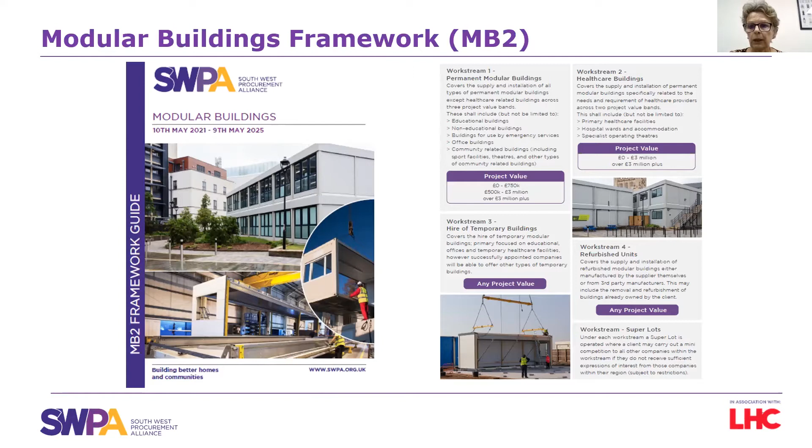Modular buildings launched in May, modular buildings 2. It has 4 work streams: permanent modular buildings, healthcare buildings, the hire of temporary buildings, and a new one for us, refurbished buildings, which very much fits in with our wish to be environmentally friendly and improve our environmental sustainability. Within those work streams we do have value bands in both the permanent modular buildings work stream and the healthcare ones - 3 value bands in the permanent and 2 in the healthcare, but the others we don't have value bands in.

In terms of the evaluation and the companies appointed, it was done on a 75% quality, 25% price evaluation. We talked about general quality, as you would, and regional capability, which is very important - can you deliver within the regions? There's nothing worse than us talking to a client and saying we've got all these fantastic companies on our frameworks, and then the companies say they can't actually deliver within some of the areas that we want them to. That's of particular importance in the Southwest - the far Southwest is sometimes a challenge for companies.

So we do pay a lot of attention to that. We did go and do site and factory visits, mostly in person, but during lockdown some of them we had to do by video link. I know our technical support managers really enjoyed the opportunity to go out and visit people.

And then the pricing was done in detail - I've got a more detailed slide on the pricing and the pricing assessment. These are the companies that have appointed to the various work streams in various configurations and setups. MAR and Elliott's are top, and they were all value banded and ranked - actually top in a number of the value bands, but we can provide you with details of that if you want.

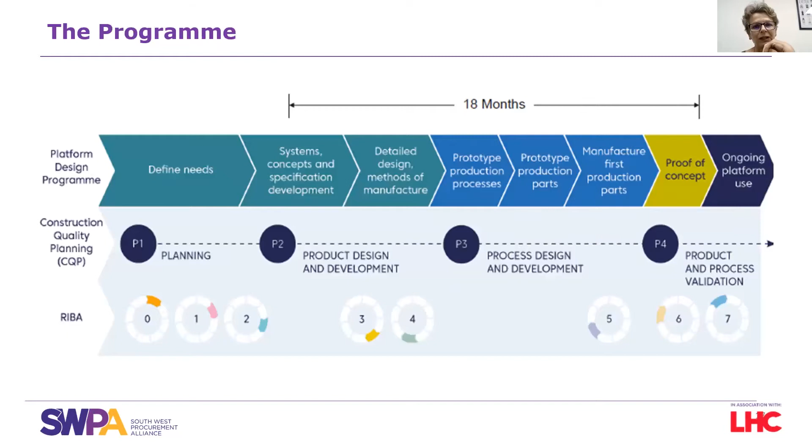Very interesting - what they have done is assess what types of buildings and internal components are needed across their public estate, and come up with standardised elements. They've looked at how many corridors, circulation spaces, living rooms and bedrooms they need, and done this piece of work. If you go on the Construction Innovation Hub there's a whole report on it, which is fascinating. You could standardize these, and these are some of their key findings.

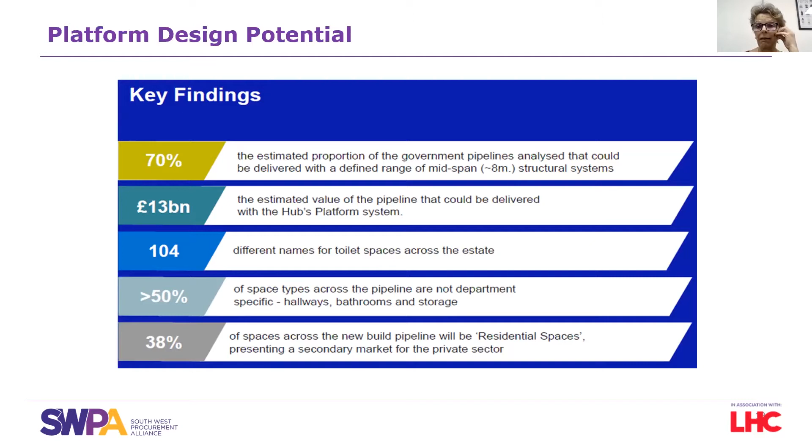I suppose the one that I love is the fact that there's 104 different names for toilet spaces across the estate. But a lot of these internal spaces that people are building are the same across the whole estate. The industry is engaging in the platform design programme, so have a look at how it's working with components and all the rest of it - there's the link there.

As a business, we're looking towards the future and where we can go with the modular offering. We've recently started work on a new collaborative project called Seismic 2, where we're looking to build on the success of the first project and develop solutions such as full building envelopes with embedded safety and quality, continuing all the learning we've taken from the previous seismic projects.

It is around developing a component solution - potential for external manufacture of certain elements such as wall panels, roofs, toilet pods - and bringing those in and assembling them into the modules themselves.

So the intention of seismic is that we have standardized the grid, and we've developed, in conjunction with some of our competitors, a universal connector block. This means a number of modules from different manufacturers could all be fitted together. So through standardization of components, we're hoping to drive down costs through economy of scale.

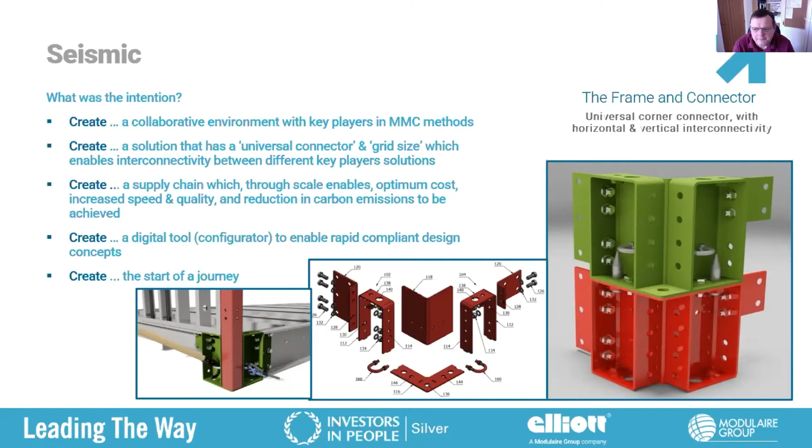Finally, just to look at opportunities in the future and where we would like to go - we want to look at solutions from frame to envelope and beyond. We're currently bidding for government funding for a new demonstrator project to look at the fabric of the building, for standardization of the facade, floor and roof design, which is the next logical step for ourselves.

We've already come up with a solution for the modular frame. So looking at the envelope is something that we really want to drive, trying to get a standardized solution.

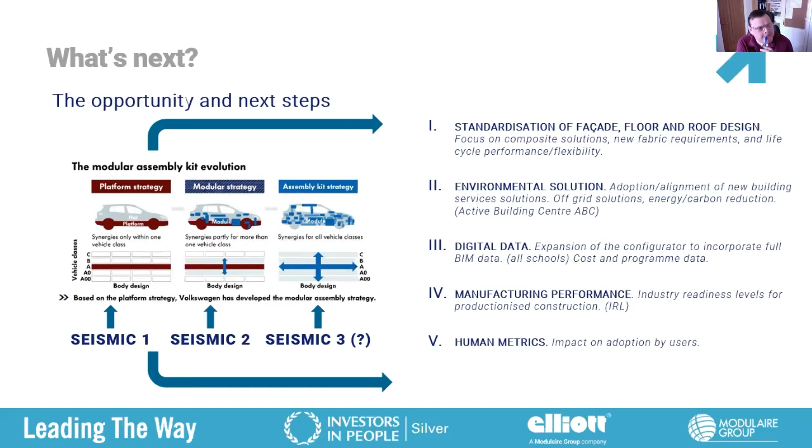In terms of the architectural side, I think to just very quickly rattle through a few concepts. As HLM, we've done a lot of work on modular across other sectors, starting with the defence sector, doing the single living accommodation modernisation programme, which is residential, and a lot of the modular solutions provided through those sectors is definitely the first place to start.

The move to education has really helped, because that has a lot of component parts that can be followed through to a sensible offsite solution. I think certainly as healthcare architects, we found the biggest issue with healthcare and the modular market, both volumetric and moving into the components side, is that there are so many bespoke rooms and differences in requirements.

So what I'll try and touch on here is a few potential examples going forward where we've found the best opportunities are for the healthcare sector. As Mary mentioned, the government push is great, but it's making sure they understand where best to push and not just force something to be modular for the sake of it. It's using the solutions offered under this framework to the best advantage of the schemes, rather than being forced on high to use them. I think one of the keys there is sustainability and the net zero carbon agenda we all have to follow, not just for healthcare but other sectors.

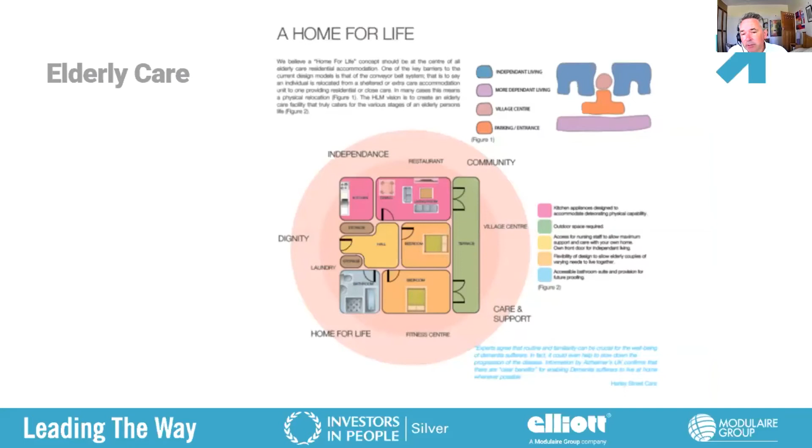Tying that in with the idea of a home for life - the ability to provide residential accommodation that's adaptable enough that you could move in at a time when you're not really considering it an older person's home or care home, but it's more about providing residential accommodation that can help our health long term, and help the throughput and flows for treatment and the NHS longer term as well.

One of the key areas the government is pushing - Simon mentioned the HIP schemes, the health infrastructure, now changed to the New Hospitals Program - but they're tying that in with primary care programs, and NHS England and Improvement are looking at opportunities for a new wave of potential primary care facilities that aim to close the gap between public health treatment and acute care.

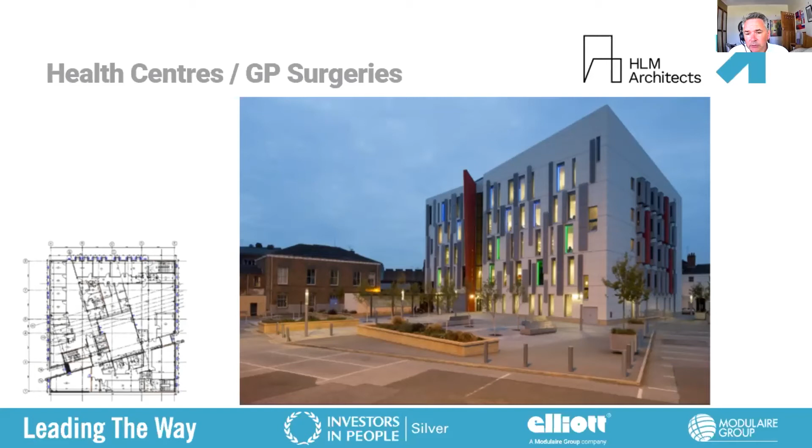Building on progress from this, an example is the LIFT schemes we've been involved with, developing solutions that allow wider community use of buildings - not just treatment. This is a really good place to start for modularization, because you've got the ability to use repeatable rooms - consult and exam rooms, for example - bays and grids that Simon talked about can be overlaid, without losing individual site constraints and aesthetics. The quality of the environment provided is so important for creating a healing environment.

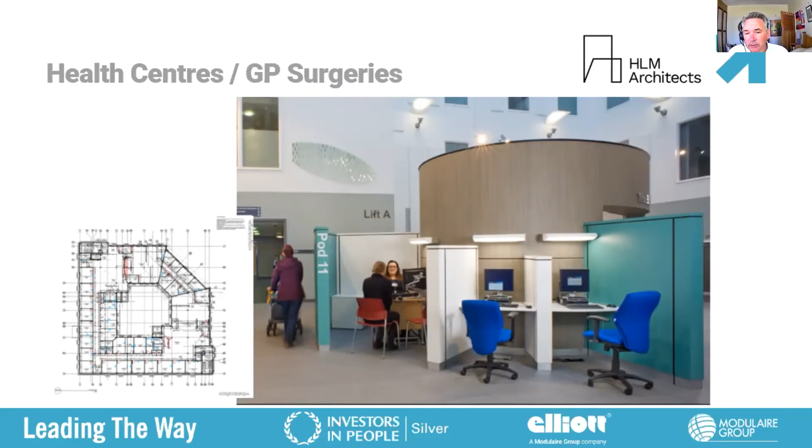Each of these samples is a series of three whole LIFT schemes we worked on, each one moving closer toward standardization. These were completed in 2008 - the beginnings of looking at that ability to provide health centres with modular construction. You can see the plan still has the character of atrium spaces and combined public health spaces, health pods etc., along with requirements for one-way movement and possible solutions for patient flows that tie in now with the sorts of things we have to look at following the recent pandemic.

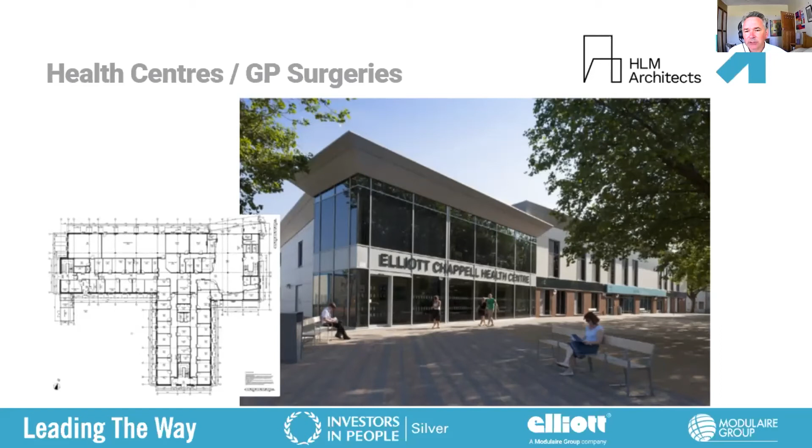Each of the layouts shows that quality in the solutions provided. You still maintain key elements of natural light and the ability to look out, but the external environment doesn't end up looking like a modular solution. It has the ability to provide a finish more akin to what would be considered traditional solutions.

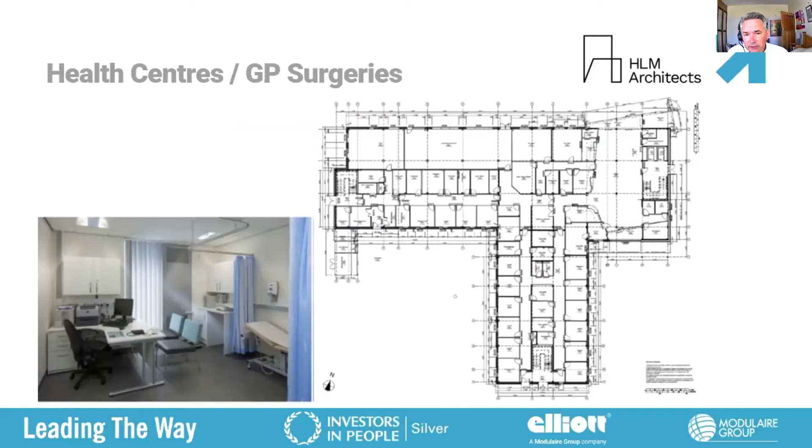I talked about the repeatable rooms. There are elements that we are pulling across from the Procure 22 program. They have a series of, I think, 13 rooms now based around A&E, inpatient accommodation and mental health. And the idea is that those start to form the design repeatable elements that can start to feed through to the delivery and the modularization. That is starting to show progress within the framework itself, the Procure 22, which is open for NHS sharing.

Next, please. That's just a link through. We'll send these slides out, but that'll link through to the website if anybody hasn't seen it already.

Next slide, please. One of the other key areas I think we'd be looking at developing - we've been working with some third-party developers for the provision of central sterile supply departments, CSSDs, maintaining the workflows. They're fairly strict workflows, of course. They are ideal for providing potential off-site volumetric solutions that could be broken down into the most efficient sizes for quick construction. And of course, larger acute trusts can provide a central service across various supplied services and buildings.

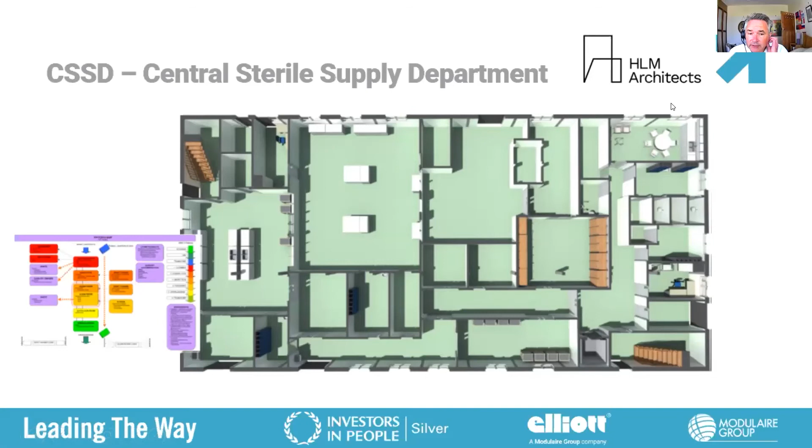Next, please. That's just looking in a bit more detail at the layout and getting a standard minimum size and being able to then expand depending on numbers of packaging machines and autoclaves, etc.

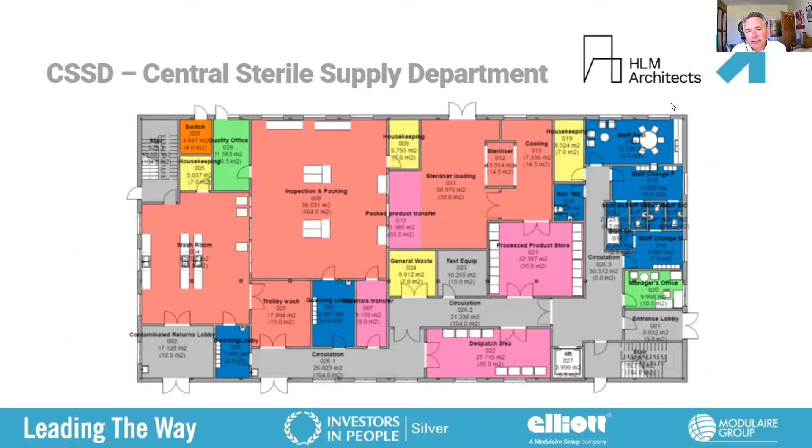Next, please. And then finally, it's just looking at one of the more bespoke areas. Of course, we know that we can get mobile diagnostic units. One of the things we're looking at with a lot of the health centres is the ability to plug in mobile units with ease of access for patients, which can also follow through to the ability to deliver diagnostic equipment for a modularised solution.

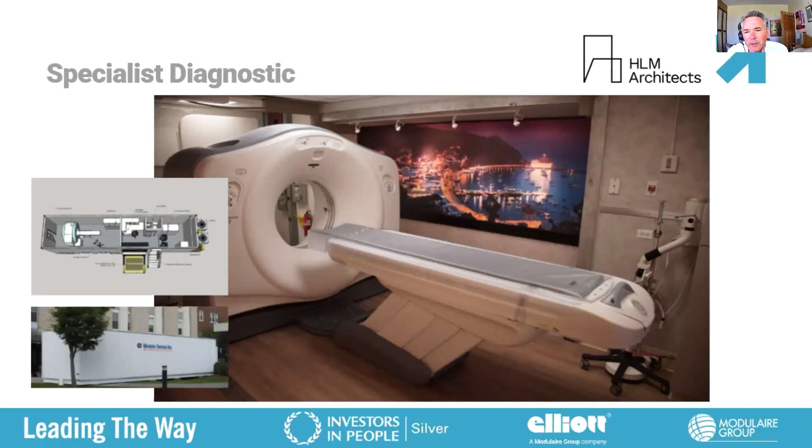So I've just tried to give you a bit of an overview, I suppose a vision of where we know there are modular solutions already, but that proper modular construction could be a way forward on future projects. So, unless Mary wants to add anything, I'll hand straight over to Ryan from MAR.

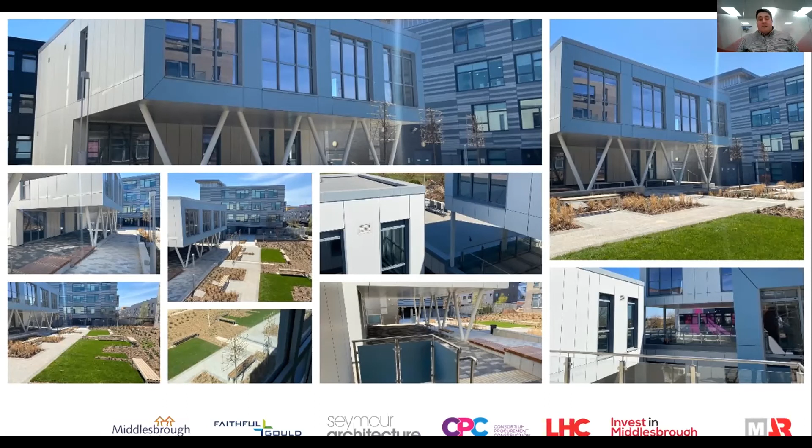It was also super engineered to create these V-shaped steel columns to deliver the structural support. High quality office space, all delivered within a factory environment and completed on site.

As we mentioned, working with the local community, and particularly the key stakeholders, has been important. This is Andy Preston, the Middlesbrough mayor, a very forward-thinking mayor who has been actively involved in the scheme with us.

The big thing from the client is that the area has been regenerated by a number of different construction technologies and contractors, and we were the last people to start in what was a small pocket. To the right-hand side there's a traditional build which started some 6 months before we physically started on site, and we finished sooner.

Those office spaces are rented out for the council, which ultimately goes back into the public purse. By finishing the job sooner and delivering such a high quality office environment, they've all been snapped up now within a matter of weeks, and there are new businesses that have started working in those areas too.

And what was really good is the community that was built around that project through what was difficult times last summer.

Michael from Middlesbrough Council made comments around the speedy delivery and the certainty around offsite construction being really important.

Brexit and the lockdowns and COVID pandemic were a big risk for the project that we worked hard to deliver out on, and the technology surely helped.

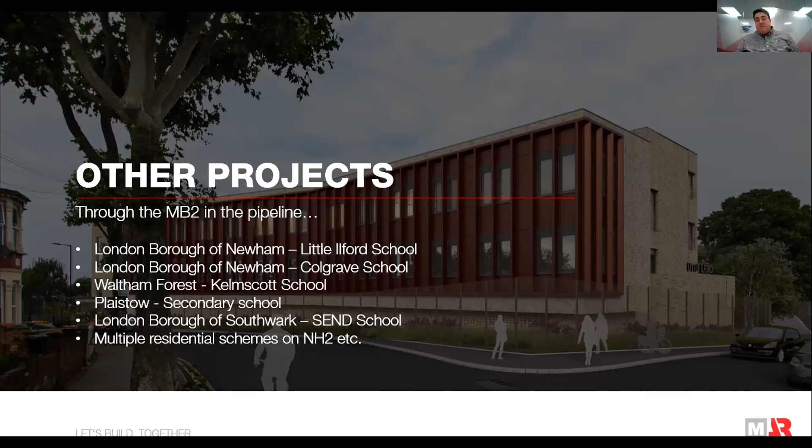So we've got plenty of work ongoing within the London boroughs, particularly areas that have actual logistics issues. We work hard with our clients to unpick those risks at the start before we start designing. And again, all of these are coming through this MB2 pipeline and have been delivered.

Ultimately, what we're trying to do is offer a really refreshing approach, not only to construction, but to the modular world as well.

I was so pleased when we were appointed at the top of the group on the MB2, purely because, as Mary has mentioned, we are talking about a highly weighted quality framework, and for us to stand out and deliver what we did was really testament not only to our team, but to the framework as well. We also have the ability for people to direct award within the framework.

We'd love to get involved with clients who want that early engagement and want to be helped through the process of understanding how far their budgets can go and what challenges need to be overcome.

Ultimately, what we really want to do is build good quality relationships with good people in the marketplace, and we would absolutely love to introduce some of you to some of our projects. And you never know, if time permits, we are back open for factory visits too.